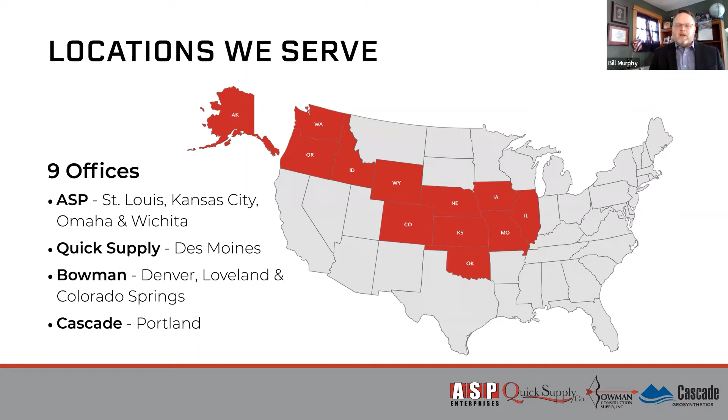You're familiar with our erosion control and sediment control solutions for sure. We do like to continue to educate folks on geosynthetics like we're going to do today. A lot of my time is spent on stormwater management with green infrastructure and low impact development. We're also experts in vegetative solutions, and some of our locations even have hardscapes available.

We are experts at logistics. One of the things we found as a challenge over the last couple of years, and we've been blessed to stay on top of it, is inventory management and receiving product in time to get it delivered to a job site. One of the things we're very good at, and I'll show it in the next slide, is receiving truckloads of product, breaking that down to exactly what you need on your job site and delivering it when you need it, where you need it.

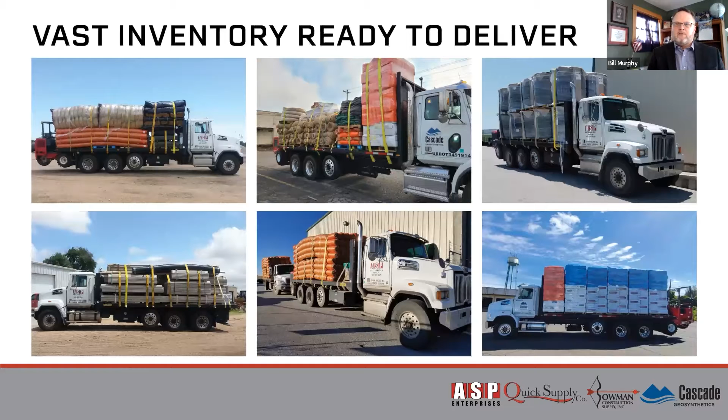We've been blessed to be essential over the last couple of years, so we've been very, very busy, and we plan to continue that trend. I was recently asked a question by a very good friend of mine at an engineering firm in Kansas City if we have any concerns about product availability with the Mirafi products, and I was very happy after I double checked with our managers to say, no, we have no problem at all.

We've been blessed, and those trucks are still rolling. So winter doesn't stop us. We've stayed busy. And as many locations as we're in, the pendulum swings sometimes from one market to the other. One thing stays constant: there's a lot of people trusting us with their site solutions, and there's a lot of people who have been with us for many, many years.

And speaking of many, many years, our next speaker here is in the room already, Jim Golomski. Jim is with Tencate Mirafi. I've known Jim for the 8 years I've been with this company and a little before that. Jim is one of the professionals that we lean on whenever you have questions for us, and he represents a number of our locations. I did not write down Jim's bio.

I have known him for a very long time. Jim, not to embarrass you or anything, you know that we have a good personal relationship and a good working relationship. I sometimes like to mention you're a guy with football experience and college experience, but mostly for me, it's that you're a family man with professional experience, and I get to see you again this week at Geo Omaha on Friday. Do you want to introduce yourself at all and add anything to that?

Yeah, that's perfect. That pretty much covers it. 1234. It's what? I hurried through. Yeah, right on time. No, perfect. Thanks, Bill, for the introduction.

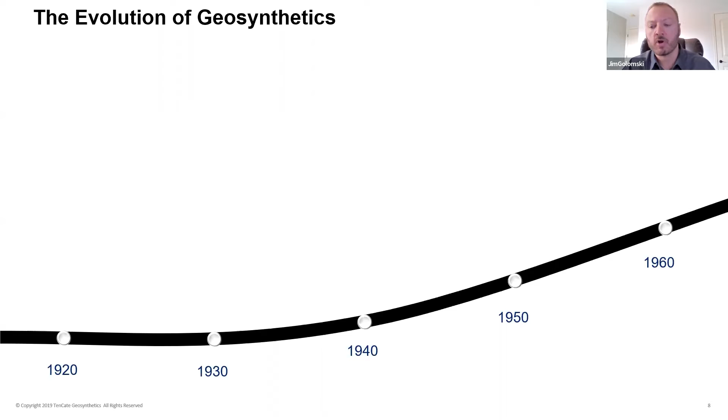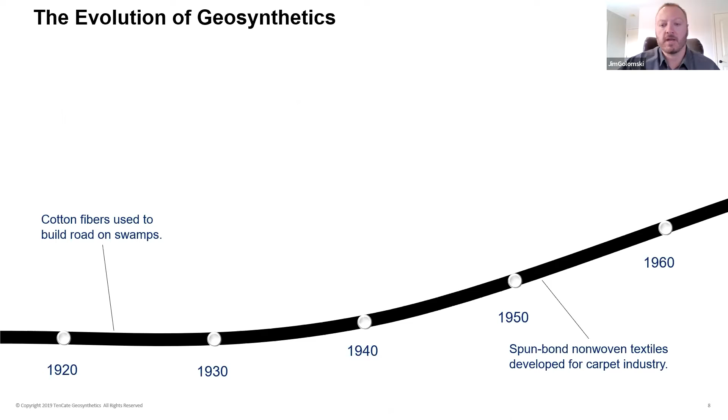Just real briefly, everything got started in the U.S. back in the late 1920s, with fibers used in swamps, but that's still not really our industry. The spunbond came about in the 50s, and our products are these needle punched nonwovens, which appeared in Europe - that's what the Mirafi products are. All of these came out of the carpet industry in the US, down in the Southeast, and that's basically where we were with nonwovens.

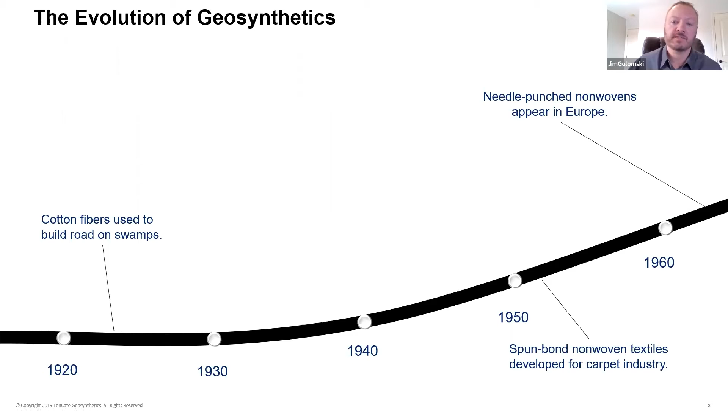Then Mirafi was named - if you didn't know the name, we get a lot of Mirafi. Mirafi comes from the names Miracle Fibers, coined a little bit in the late 60s, first used in a dam. Really, nonwovens, which we'll talk about, were the only product that existed until this time.

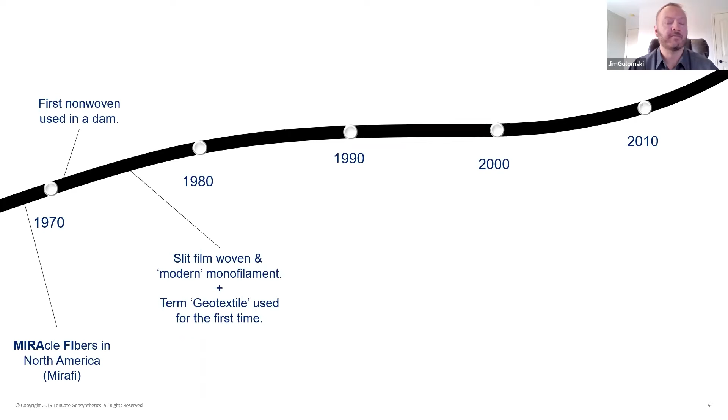And then we get slit films, wovens - ours are called the X series, but they're slit films - and then monofilaments, and this is where the term geotextile came from. The monofilaments are our product we'll show you that was really developed with and in conjunction with the United States Army Corps of Engineers for use for engineered erosion control, to be able to have high flow rates and high separation of products.

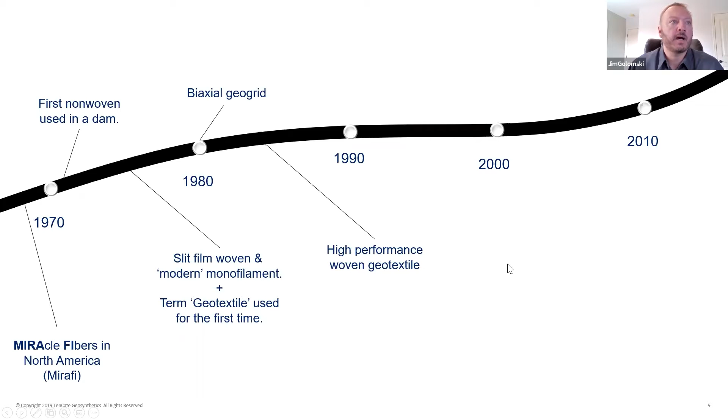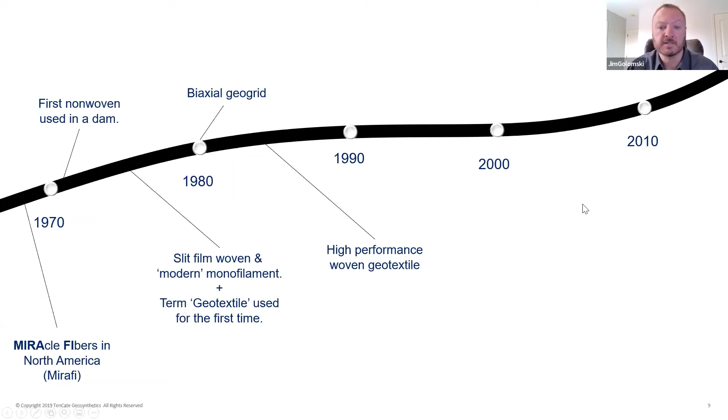Then in the early 80s, many of you might be familiar with biaxial geogrids, came over from Europe. Then Mirafi came out with high performance woven geotextiles - if you're familiar with that, it's our HP series, HP 570, very common. So we've gone from non-wovens to slit films, now we get biaxial HPs. And then the markets stayed a lot the same way until modern day.

In 2010, right when I joined this company, we came out with our RSI series, an integrated geosynthetic. Then a few years later, our Mirafi H2Ri. So that's pretty much our iPhone 13. Bill, correct me, is that where we're at in the iPhone world anyways? I don't know, I think that's right. I think we're somewhere close, but that is the most modern thing.

As we go, something eventually is going to become better. I don't know when, because we haven't had a lot of breakthroughs in these last 2 years, but I'm excited to tell you more about these products and show you some case histories and applications that we've used.

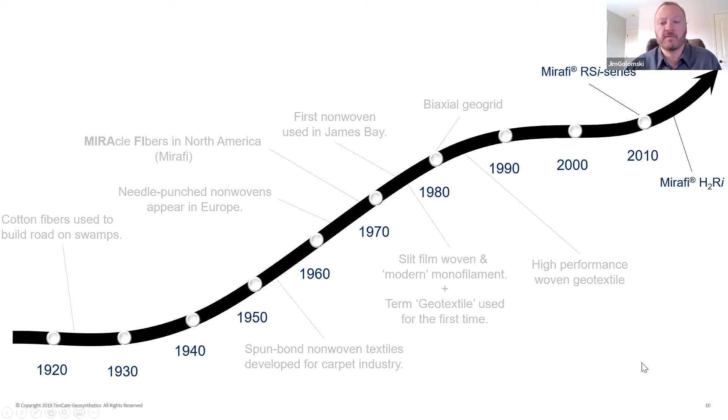Going back to the original product, the one we started showing, here's what ours looks like. Ours is called the N series, and these are non-woven needle punch fibers. All of these products are basically polypropylene that we make in our plants in Georgia, extrude the yarns, punch them, and create them.

Non-wovens are definitely the most common product out there in the market, and ours are basically described by weight. So a 4-ounce non-woven means 4 ounces per square yard, approximately, and we'd call that 140N. You have all the way from 140 to 32-ounce non-wovens, but common in the market you see 4, 6, and 8-ounce non-wovens used every day for French drains, wrap drains, erosion control, and cushioning layers.

In the environmental world and landfills, you start seeing the 16, 20 ounces much more common. That really just packs a whole lot more fibers into a square yard.

So as you want to make a geotextile stronger, you have to add more fibers to it, and the more fibers and strength you pack into each square yard, the lower your flow rates get. For example, a 4-ounce non-woven will not be nearly as strong as a 16-ounce non-woven, but it will have much greater drainage properties. The 16-ounce will have greater filtration properties because there's more fibers in there to separate materials. But they're very good products.

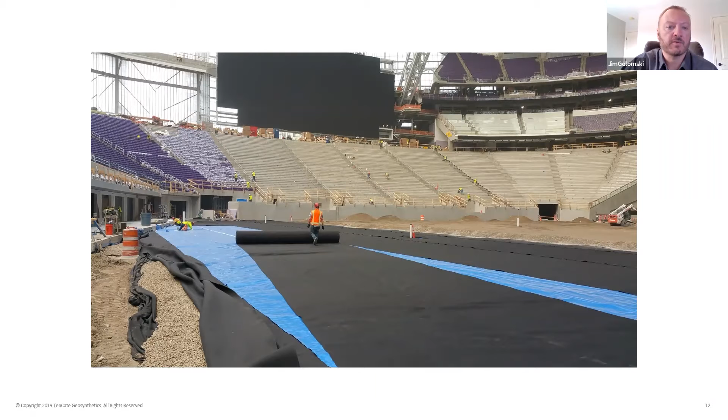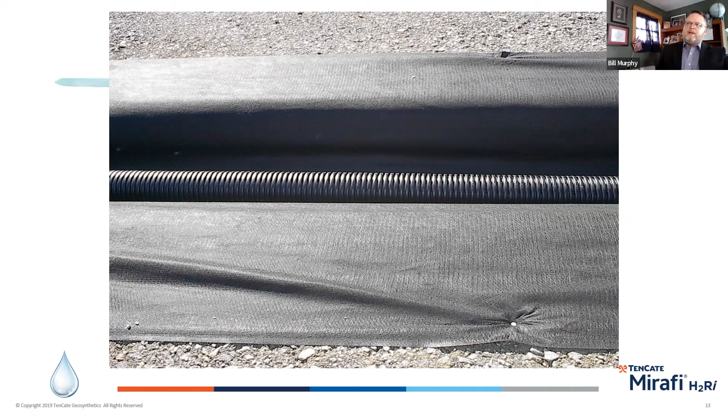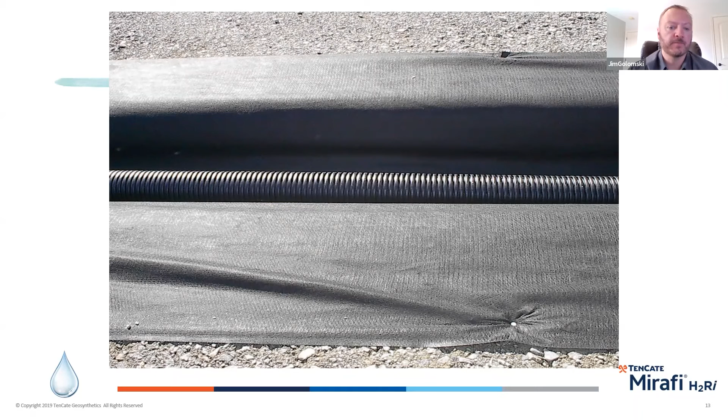Here's another very common one: pipe's going to be backfilled. So they cut a trench, laid the fabric, wrap it in rock, and then burrito wrap on top with the non-woven geotextile. I love that the burrito wrap is around the clean rock and not just around the pipe itself—that's a very good point. So yeah, the goal is, whatever soil gets put back on top, to keep that rock separated so that water can flow through that rock section and into the pipe.

After that, the next product, which I believe our slide said came around 1980, is a product we call X series. For us, 500X, 600X—other people call them STs, for slit tapes. Very, very common, one of the largest selling products of all time. And I'm also here to tell you it's our worst product. The industry has definitely evolved industry-wide away from these products. If you want to think about the manufacturing of this woven, it's much like a cassette tape yarn—very flat yarn woven very tightly together.

So what you get with this is separation—you can separate materials, but you get very, very poor water flow, which we'll talk about. And they're also very slick, and they're also weak as far as woven goes. Due to the manufacturing process, it's the best you can really get out of slit tape yarns. It was the best thing you could do from a woven 30, 40 years ago—I guess that would be 1980, 40 years ago.

That's why they were more commonly used. But definitely technology has affected the woven products much, much greater than the non-wovens.

So here's where you start seeing the evolution of geosynthetics within the wovens, because the properties that make them go—tensile strength, flow rates, frictional capabilities—if we're going back to an iPhone, this is like talking about camera increases in a phone: your ability to take pictures and video, storage, all these things where the phones can look alike, but the capabilities and performances are just dramatically different.

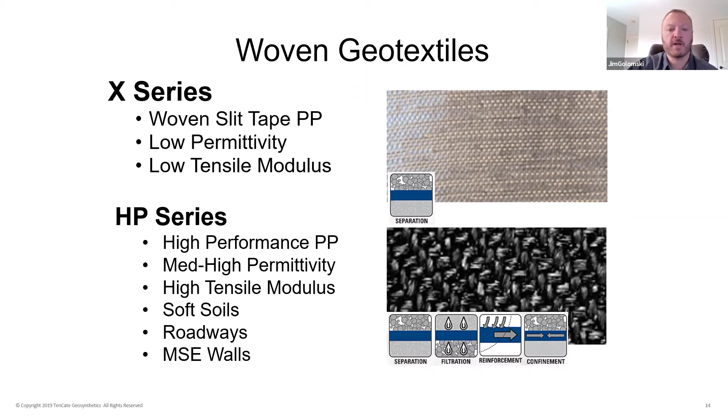The fabrics work by interlocking, confining, and tricking rock into thinking there's more rock than there actually is, by its ability to keep it in place. Confinement, reinforcement - making 8 inches feel like 16, or 12 like 25, is really the whole goal. So when using these for stabilization projects, there should be a huge cost savings versus putting natural rock in place to get equal performance.

And we have design software that I'm not going to touch on in Geo 101 today, but it is there for designing either paved or unpaved roads.

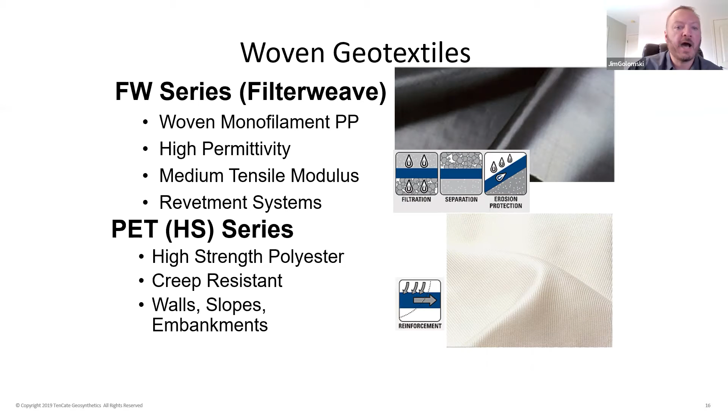It's an engineered product, very, very good because each hole is engineered and detailed to a specific size to keep soil and whatever's on the other side from intermixing. Here it's like a hard armor type system. But these holes also allow huge water flow, which is very important for any tidal or channel type application. Here's where you would look for a filter weave.

Versus a non-woven for erosion control type projects when it's tidal or water conditions, where clogging could be an issue long-term on a non-woven.

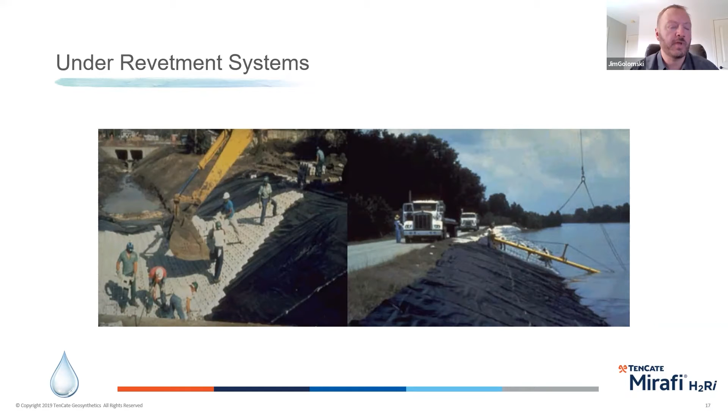So that's all of these products in the geosynthetics world - we're talking about Geo 101. That was geotextiles, wovens and non-wovens. And now the other half under geosynthetics comes geogrids. There are 2 types of grids: uniaxial or multi-axial.

Uniaxial is very common - these are for your walls and slopes. Geogrid has high strength in one direction. For us, and common in this industry, this is the one exception where it's not 100% polypropylene - these are polyester yarns coated in PVC. Polyester, from a purely tensile strength standpoint, has a much higher strength-to-weight ratio, and you're able to get a lot of strength out of the polyester grids.

So that's the product we sell - Miragrid XT is the product name, and I'm just going to touch on that. It has strength in one direction, so if the wall wants to fall this way, that force has to be directed back into the wall. Biaxial geogrids, on the other hand, can be laid any way.

Anything I'm showing you can be installed - it's pretty idiot proof. But with this stuff, if you took a layer of the grid and put it perpendicular to the wall strength-wise, your wall would fall down. So this is one where installation is very critical.

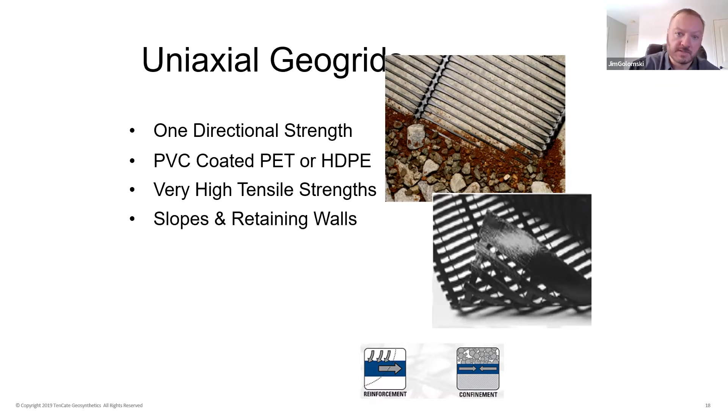And like I said, high strength to weight ratio, very good for walls and slopes. Staying in geogrids, biaxial geogrids have been around since the 80s, bidirectional and tridirectional.

These are typically polypropylene type products. I don't think there really are any more polyester biaxial geogrids on the market, I can't think of any. But these products are very good, very high strength at low strain.

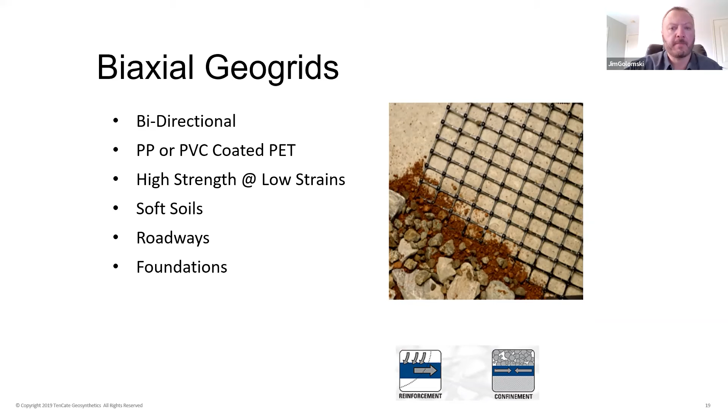So we kind of started with this basic overview of some of the products, but this is what we're looking for, the properties that define a geosynthetic.

And they can't all do everything. So separation is the ability to keep the soil and the rock from intermixing. Filtration is the ability to allow water to pass through, from that wet subgrade through the fabric into the rock section, without trapping itself underneath. Drainage is the in-plane ability to allow water to move itself out.

And then confinement, which is done in a lot of ways. On a fabric, it's done through friction, 100% friction and coverage. On geogrids, confinement is done through those apertures, where you get rock strike through, and that builds a matrix of rocks on top of the apertures, confining the rock so it can't laterally move. It's the same idea with a fabric used for reinforcement, putting an in-plane tensile element pulled tight so it reinforces that entire zone or road.

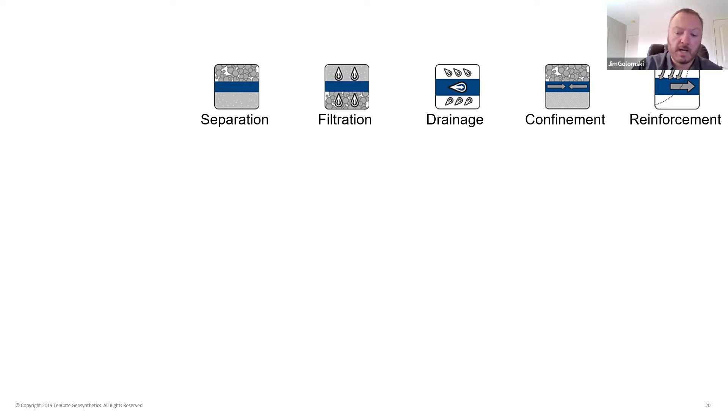As this industry has evolved, the question became, what can these products do? We just talked about non-wovens, filter weaves for erosion, slit films, geogrids, and high-performance wovens. And what are they doing, where do they excel? Non-wovens separate materials, filter water, drain water, but they're not great for building with.

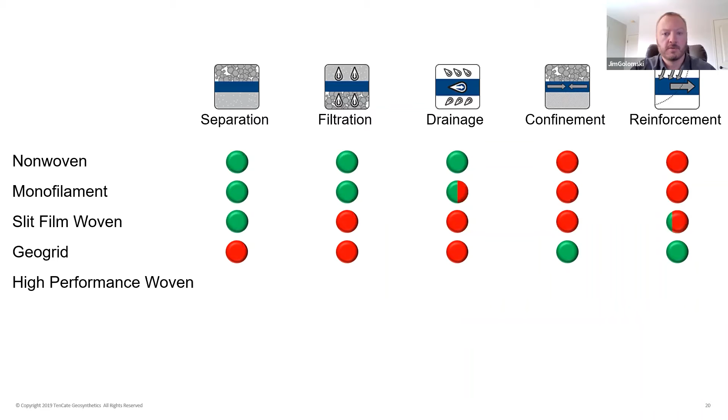Very similar to the monofilament, really the monofilament is the engineered version of a non-woven. Slit films handle separation, that's it, with maybe a little bit of reinforcement if it's a really high strength slit film. Geogrids capture the other side of this equation, confinement and reinforcement, but they don't do any filtration or separation of particles that can't be naturally filtered.

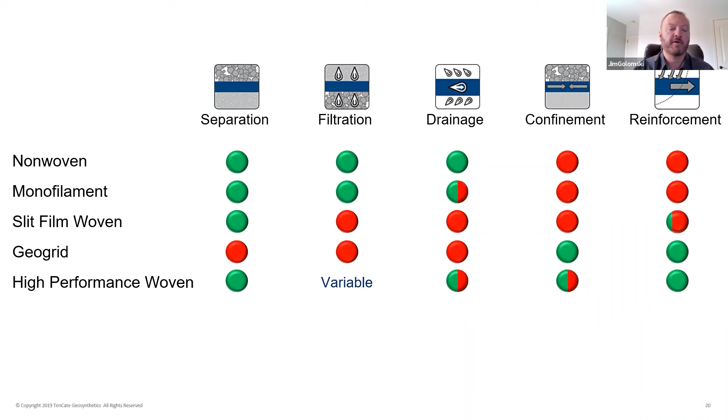And finally, the high performance wovens. All of these vary based on the flow rates of the product. This brings us to 2010 and the industry dilemma of, well, what fabric should I always use for what? One product cannot do it all.

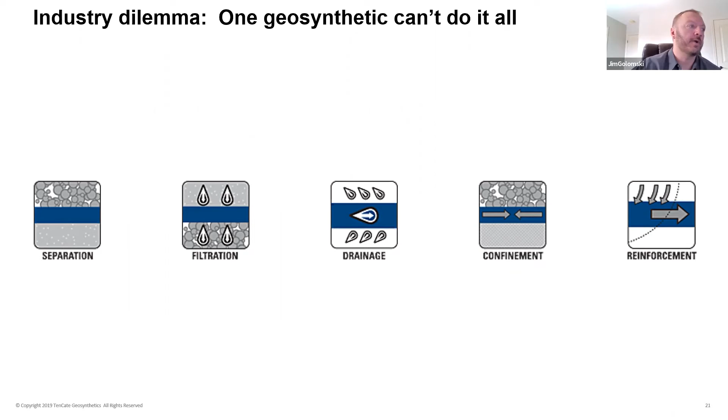Well, I don't know if we can give an award. This works better in person. But what decreases? Is there anyone in the Q&A? What's going to decrease as the strength of these products increases? I haven't seen any Q&A yet. Maybe you can give someone extra PDHs if they answer, I know it's super difficult to answer questions in this format. Unless we did a poll, maybe we'll evolve to having a poll where they click on something. That'd be nice, I'll make a note. Yeah, I was starting to think, did my Wi-Fi go out? Is anyone here? No, you're good. Is this thing on? Yeah. I'm going to hang up and listen.

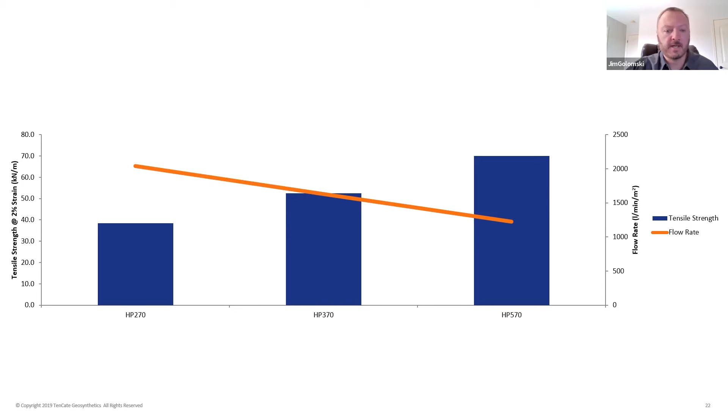So here's what happens to flow rates as tensile strengths go up. As we add material to the square yard, we add cost to the square yard, and we add strength, but we start losing flow rates. Some of you might say, who cares? Let's take a look at a study.

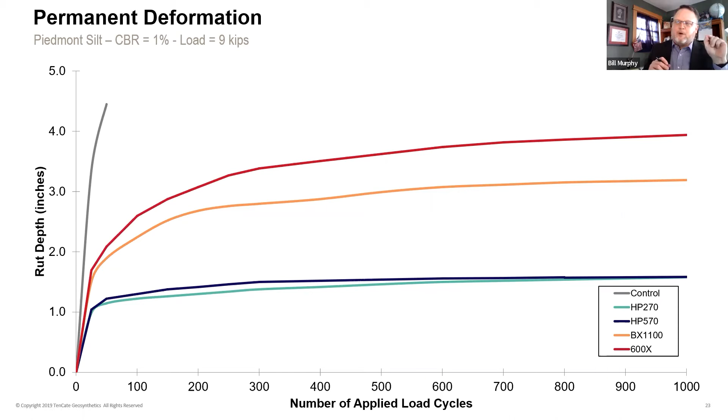Moving my picture again, you're sliding your display. Yeah, that only affects me, right? Yeah, it only affects you. And you're handling the lag like a pro—there's sometimes a 6 or 7 second lag from when you click it, but you're handling it very well. Sorry, my picture always ends up where I'm trying to look at something.

So this is a test they ran, and we have a CBR of 1. For those who don't know, a CBR of 1 is one of the lower strength soils we can be talking about. At a CBR of 1, you're probably out walking in this and sinking to your ankles—your shoes are definitely sinking into the ground. That's how poor of a material this is. When we test products, and quite often we're on sites like this, you want to test them in these conditions, not only because they shine, but because they're absolutely needed.

The BX 1100—the gray is the control section on the far left. You can see, and this also speaks to any geosynthetic in a soft soil, it's going to benefit you; it's just a matter of which one you should use. Next after the 600X was the Geogrid, the BX 1100, which is a very good product with very good confinement. But what's clear is happening here is at a CBR of 1 you're going to get that mush underneath coming up through and interacting with the rock section. The more interaction of soil coming through and interacting with the rock, the more the rock acts like the soil.

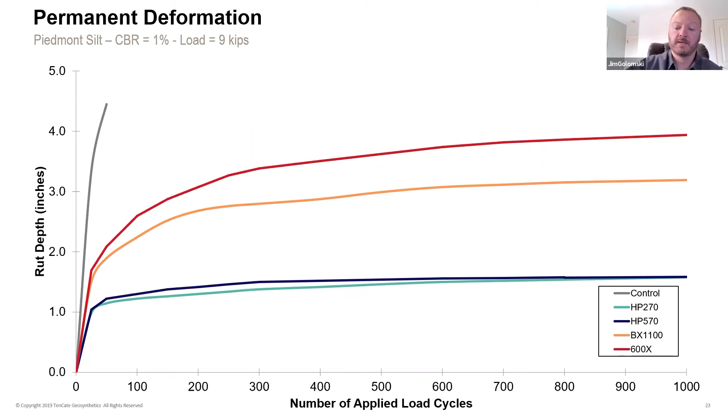Then we have HP 270 and 570, and this really confused our people, because prior to this everybody always assumed more strength, more tensile strength, greater performance. But these two products came in neck and neck. This led to the next question asked, which is about flow rates, getting back to it—so why does it matter that a product can be stronger but perform weaker?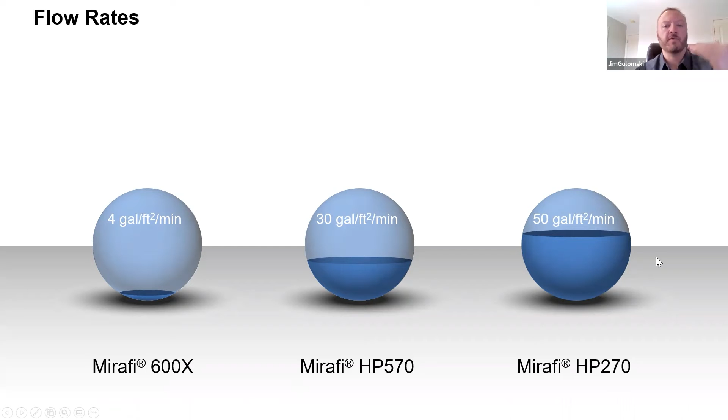Excuse me, going back one—so our X series products only allow 4 gallons of water per square foot per minute. Our HP 570 is 30, and our HP 270 is 50 gallons. So it's that free flow, that ability of water to move within it and not get trapped underneath it, which is helping with these deformations.

So here's the pore pressure development when they tested 600X versus a very light HP 270. You see a dramatically less pore pressure developed underneath the fabric and within the subgrade, leading to rutting and deformation.

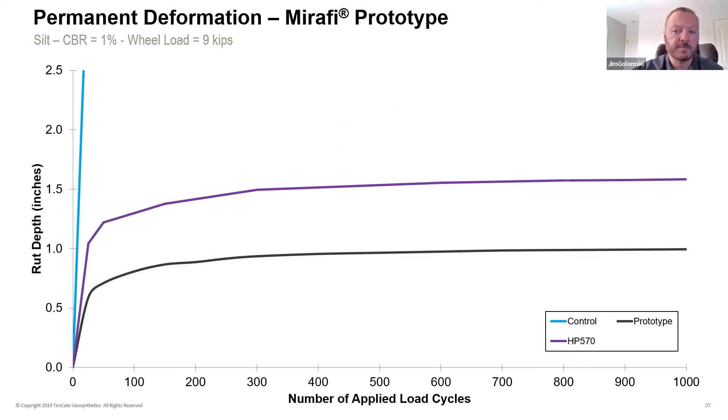And so then they developed this prototype product, which we'll now get into, to capitalize on the strength benefits of the HP and the flow rate benefits of a lighter HP. So you put those same terrible CBRs down, and you can see how much better—more than double the performance—this HP 570 hybrid prototype is. And then we brought that to market.

Then we're going to get into next—it's called the RSI series. There are two true real problems now as we start talking about utilization of these products within roadways, or structures: there's separation of materials and there's moisture issues. First we're going to really concentrate on separation and strength.

If you don't have separation between your soils and aggregate layers, you're going to lose aggregate into your subgrade just during construction—it just happens initially. You'll have infiltration of your subgrade fines into your aggregate base, and then you're going to have a dramatically reduced structural capacity of that road. I've seen so many things depending on your CBR—you can lose up to 20% of your aggregate during initial construction at a CBR of 2, and a 20% reduction of your rock leads to close to 40 to 50% reduction of your carrying capacity if we're looking at ESALs.

And then moisture, on the other hand—the problem with moisture within your rock section or your structure is it reduces the shear strength of your soil, reduces the resilient modulus of your base rock, and increases damage from freeze-thaw cycles.

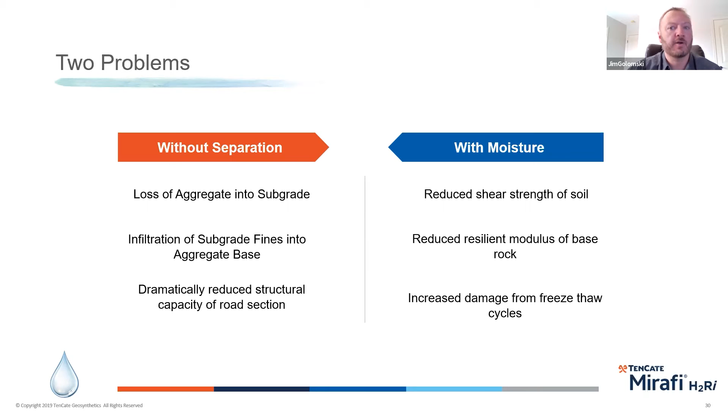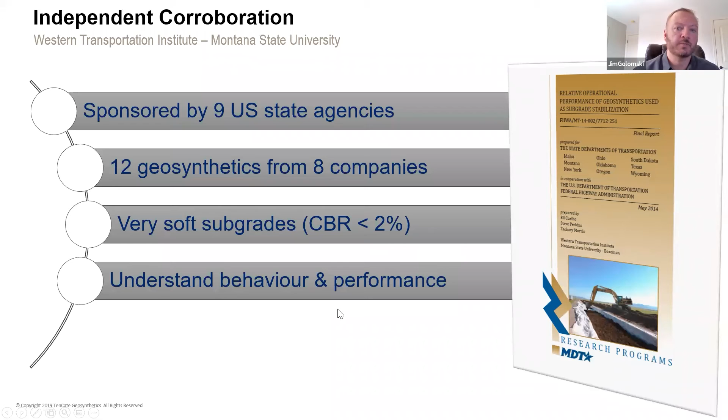So here's the newest generation of our fabrics that incorporate everything: the Tencate Mirafi RS series. Ten years ago this came out, and one of the first big studies done—we'll touch on it—was sponsored by 9 state DOT agencies. It was the Montana State study under very soft soils, with no input from manufacturers.

And sponsored—so I don't know, do we have anybody from this territory in it? Nebraska, Missouri, South Dakota, maybe? Maybe, yep. Maybe Wyoming? Maybe. You guys cover that footprint now, so you guys go out there. Yep, we go all the way from the Rockies out to the Pacific Northwest.

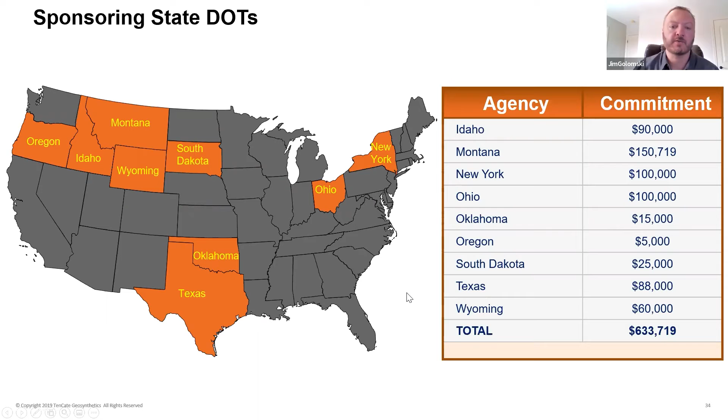So I go all the way down in Oklahoma, and based on this study, they started using this product quite a bit. It was nice to see them take the research and say, okay, I like the way that looks, and they trafficked it until it came out. The RS580i at the end came out as the highest achieving product: the greatest number of passes, the lowest amount of deformation, and the lowest deformation at any point throughout. This was one of the things that came out of the study, because a non-woven was on this and fared okay.

Why is separation so important? I'll have to speak for everybody unless Bill wants to interject. What are we looking at here in this picture?

That next slide will tell the story that I tell, because I live on a gravel road and I have to keep adding gravel to my driveway. I have no separation in my driveway.

So after this test was done, they went and exhumed sections. These lines here—the pink-red line going through the section—that's the area where the fines, or the soil from underneath the fabric or geogrid, migrated all the way up into the base rock section. An 8-ounce non-woven performed okay on this test because it was able to keep rock above it and soil below it for the time being of the test. Eventually this would have been too much pressure and it would have ruptured, but it was able to separate it.

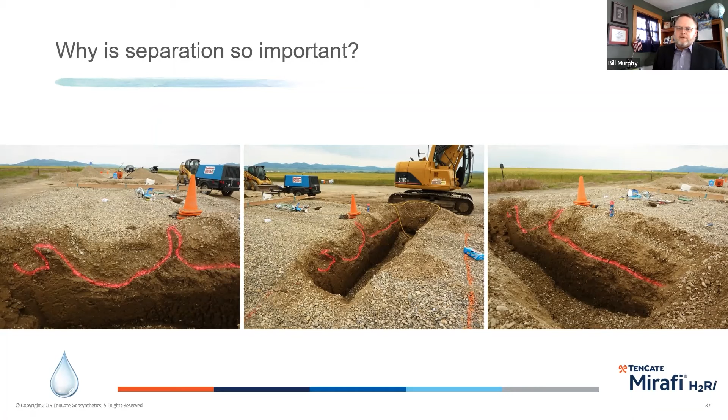And your next slide is the one that really tells the story for me, that old adage—pretty obvious, right? 10 pounds of stone placed on 10 pounds of mud is 20 pounds of mud. Yep, that's true. That is true.

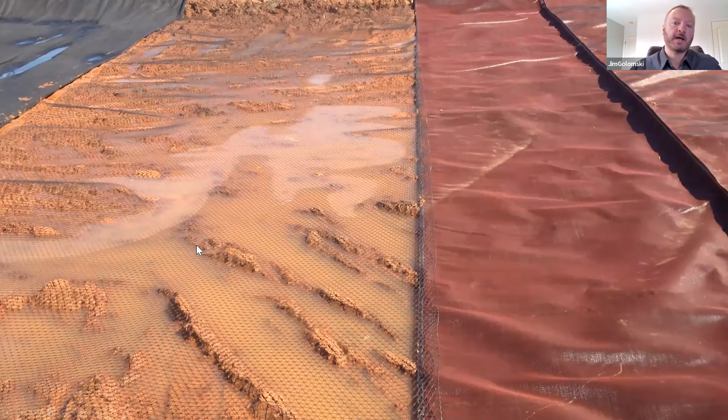Thank you, Bill. Here's kind of a test pit we've looked at. This is when you get on real poor soils, probably a CBR of about 1, that we do some tests when we train people and bring them out to see our products. This is our pit, and you can see RS, geogrid, and then a non-woven on the far side. We go out and walk on them just to see how they interact with these conditions.

I love that. You had me down there in Georgia, and I did that at Mirafi U. We had that CBR of 1 when we first stepped in, but then it just got better as we made our way across.

Yeah, and it really is something walking on the different products and seeing what happens. Some push all the way in, and then others you step on and the water just dissipates through the top of it.

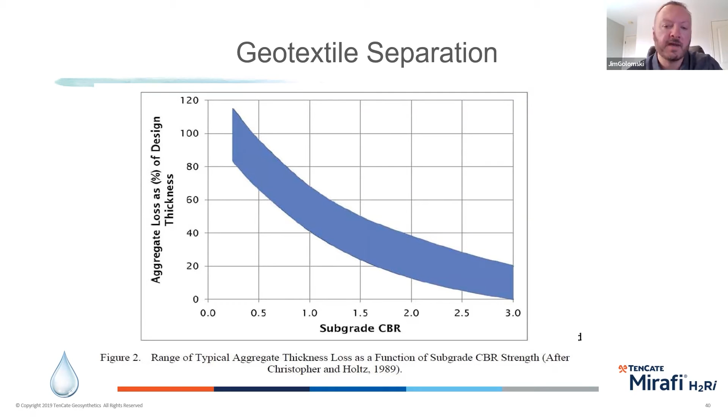Well, what does that matter? Yeah, I put 10 inches, so great, I only have 8 inches. Well, looking at this, if you lose that 20% of your structural carrying capacity, and you start looking at what a 6-inch asphalt looks like over 8 inches of rock versus 10 inches, we've now lost up to 50% of our road capability. So when roads are supposed to last 20, 30 years and they're lasting 10 or 15, this could be a huge culprit to what is causing those conditions.

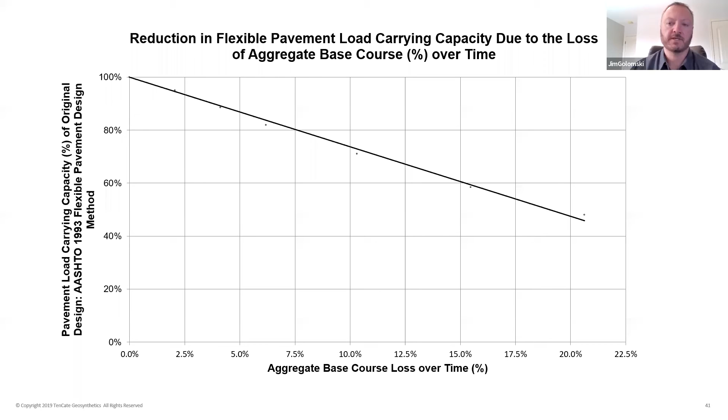So this is a term that was coined a couple years ago, and I absolutely loved it. If we're talking about building roads, this is a perpetual aggregate base. It's the combination of a common unbound aggregate base and an effective separator to establish a permanent foundation, permanently keeping everything you bought and put on top of the fabric above it, not losing it through the fabric or through intermixing. This dramatically lowers the life cycle cost of the road.

But here's some of the good stuff. It separates dissimilar materials, so your road never requires full depth reconstruction again. Mill and overlay programs can truly work because we haven't destroyed the subgrade. Keep the rock you buy above the fabric and keep the subgrade below the fabric. Separation allows the use of freer draining base aggregates.

Stabilization, confinement, restraint - confinement stabilizes and strengthens the subgrade's role. The subgrade's bearing capacity can typically be increased by up to 80% just by incorporating some sort of high-strength geosynthetic or fabric and keeping dissimilar materials from intermixing.

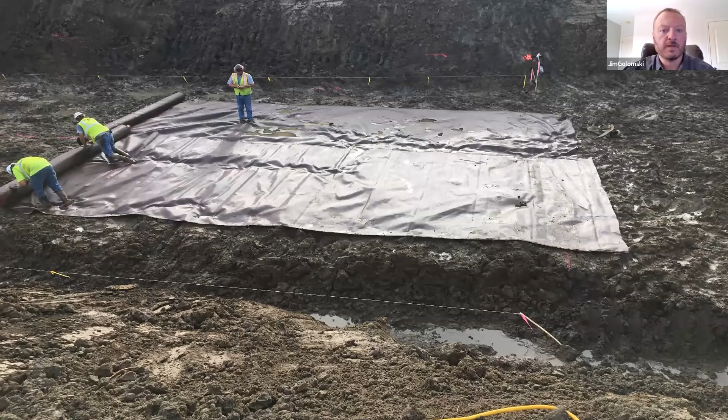This is a project we did with ASP over in Missouri.

Wow, Bill, I think we got a little issue. Yeah, I'm not touching anything. What is it, is it supposed to be a video? No, it just got a mind of its own for a minute. It kind of froze up, so we're good now.

I was called out the day before, and a guy had sunk to his hips trying to stake some of this area. They pulled him out with a rope and a track hoe. We talked about numerous things and finally found blow counts of 0 past 30 feet, so there was no bottom to this.

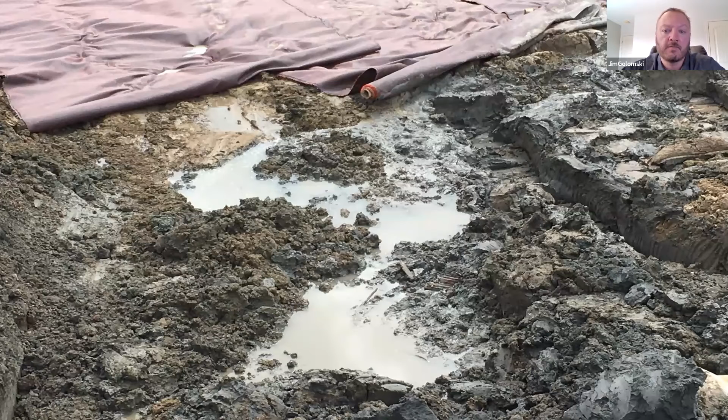So we had to put this fabric in, and the contractor was convinced it was not going to work. As soon as we got it down and started kicking and rolling it, it was a good situation - it was very hard to walk on. This is how you had to do it. Very soft, very poor ground, like I said, CBR of 0.

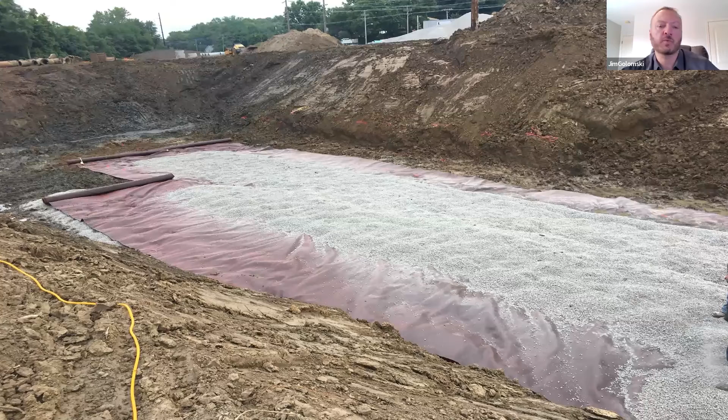We were able to shoot rock onto this site and just get building immediately. There you see some overlaps - we went with a 3-foot overlap here, though we didn't really need to because of the belt shooter. Typically, like I said, you just spread that rock.

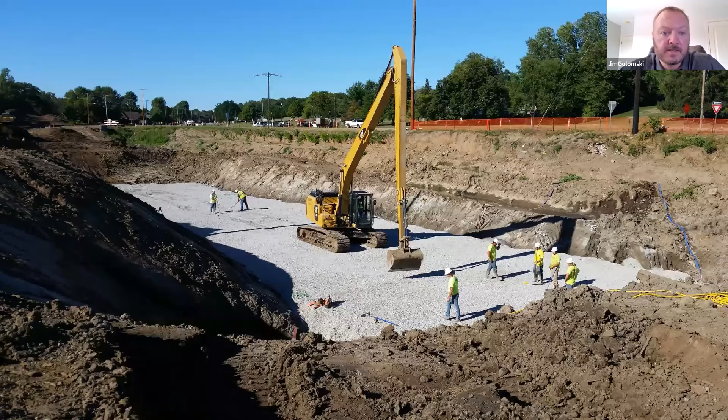This project has actually led to a relationship with this contractor. We're now traveling with him around the country, working on some huge plants for big steel companies who are using us exclusively to build all their plants because they had so much stabilization success with us.

So now that we've talked about RS, the next evolution from that is a product that can help with moisture. I just want to be able to show a few things on this and some local project installations.

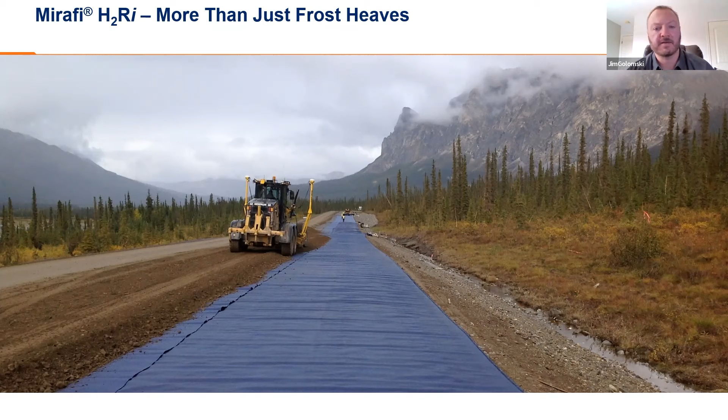So now we take a product that's very similar constructability-wise to the Mirafi RS, that super strong fabric that does everything, and we've added the ability to move water. The biggest problem with most structures is drainage - how do you move water through it? Understanding with any structure, the threat is water within it. It accelerates the deterioration of the asset, loss, risk, and takes away time and resources.

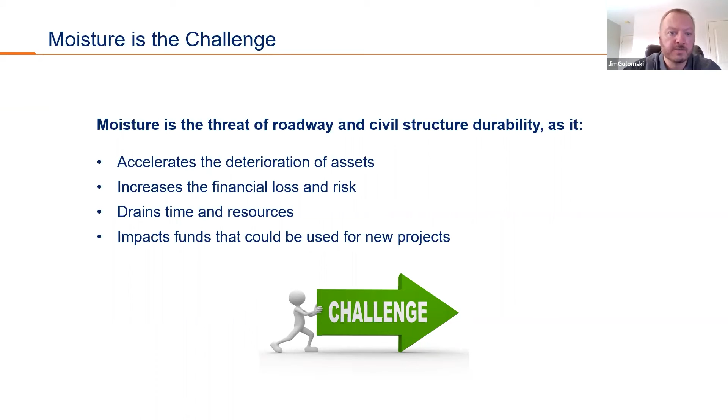I'm going to move a little quicker through these so we make sure we get to some things - well, we don't have a Q&A going, so that'll just be for me. So you're doing great, okay.

And moisture costs money - what does it really do? I'm sure Kansas City, this whole Midwest, has terrible pothole problems. $4 billion annually, which translates to $600 a driver. I remember a couple years ago giving this similar presentation, and as we were going I literally got hit by a rock coming through a pothole that put a crack in my windshield on the way to give it. So I'm very familiar with what rocks on the road and potholes can do.

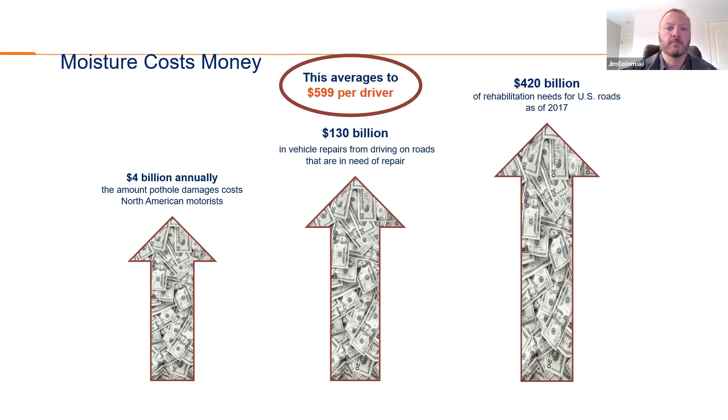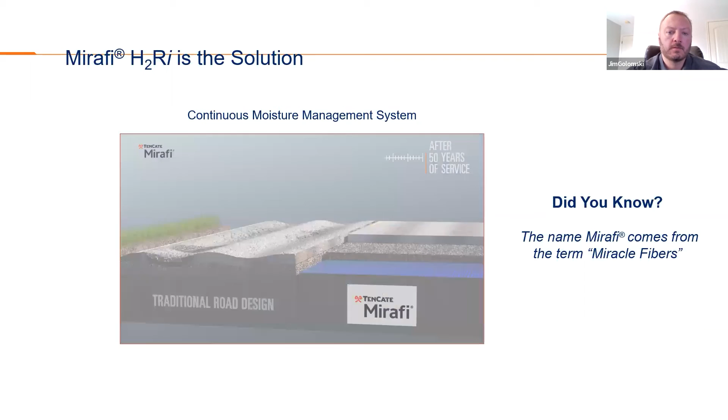So, and then this one, in my opinion, is even a little bit better. Come on.

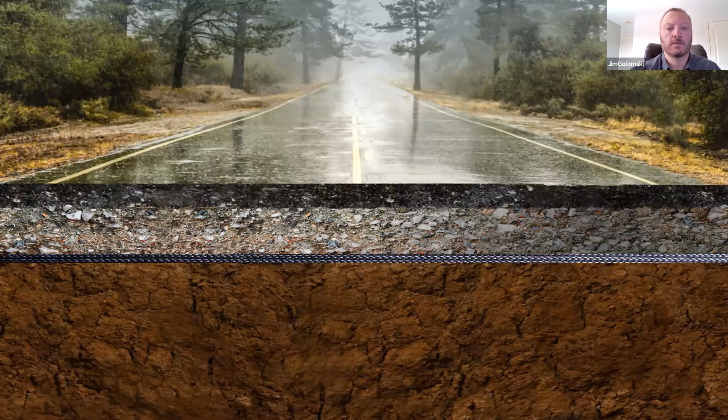Shows the water making its way down, hitting the fabric, or water from the top down or below, hitting the water, hitting the fabric, and then removing itself.

So the big key to this, guys, now we're looking at a product that separates materials. It provides filtration and separation. It provides reinforcement and confinement. It is a very, very strong frictional product like the RS, but there's nylon wicking yarns woven into this pattern that pulls water from unsaturated conditions before the soil can fully break down, or before your base rock gets real wet and breaks down in strength, and pulls it out.

The one caveat for installation here: water has to have somewhere to go. So if you would just bury this in a curb and gutter, it would effectively be like RS580i. But if you give it a chance for evaporation to work, then it can continue to pull.

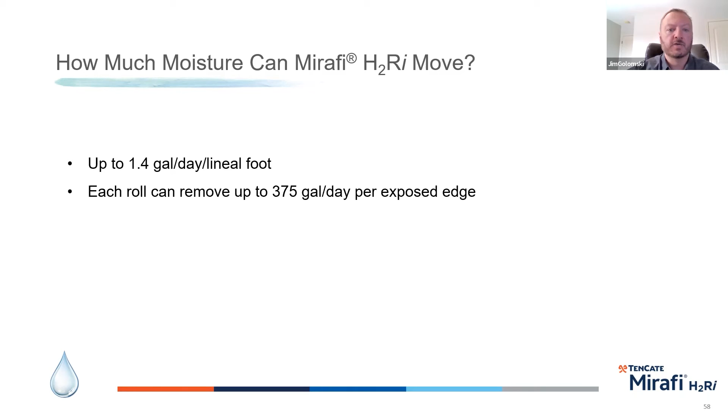How much can it continue to pull, you ask, Bill? Well, up to 1.4 gallons per day per linear foot. So every foot of exposed edge is 1.4 gallons. That means a roll is 375 gallons, and 1 mile is 15,000 gallons a day.

Pulling from not only the subgrade, but the sub-base material. What's critical here is it does not work like a drain that gets full saturation and then the water bursts through. This continually moves moisture, so as anything draws near, it moves out. Why is that important? Because at full saturation, the soil breaks down. You get full saturation, you get a weaker soil, loss of shear strength, and that CBR that's a 3 becomes a 2 and worse. So this keeps it at more optimal levels.

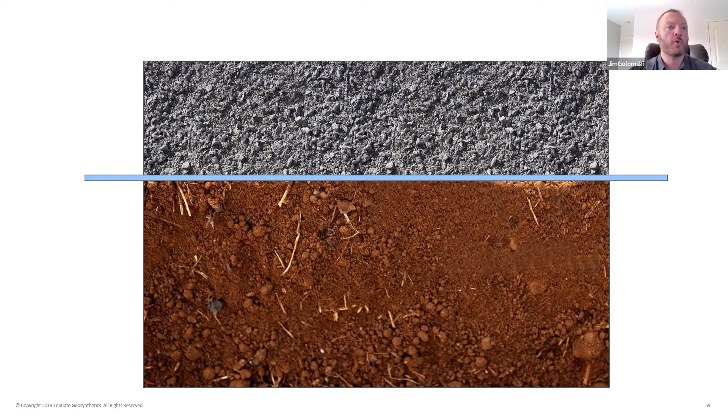So how was this developed? This was the initial road, ice road truckers, if you've ever seen this before, and you'd come over this hill and the truckers would hit the brakes and they'd rut and get this every single year.

I don't know what's going on, Bill, but I have dates that should be showing up on this stuff. It's working, everybody else sees it. We all see it, your toolbar's just covering it up. Gotcha. The viewers, the attendees are seeing it. So am I. Perfect, okay.

And they came back next year. So every year they had to rebuild this, and they put this in, monitored it, and every year they've come back, and it's not. So you see there's a rut that is developing immediately before the staking of where the H2Ri was. So the DOT was so happy with it, they started doing numerous other projects with it.

And you can see here's a real prettier one in Alaska. Here's post. We get asked about that edge treatment right there, because that was one of the first ones. You didn't really do anything specific with the edge, you just daylighted it. Correct, you see the amount of the daylight and the moisture.

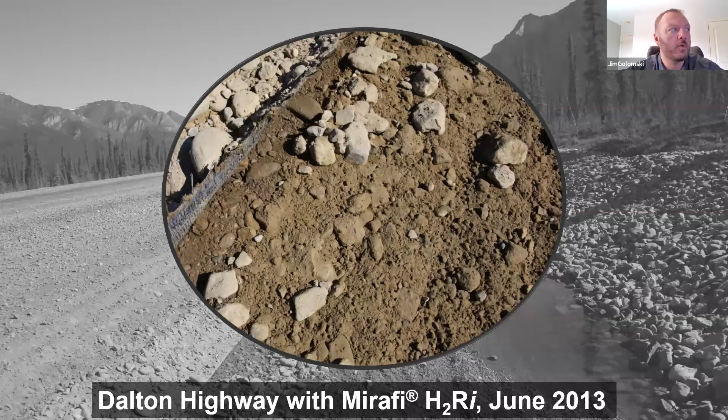And then here's even a little more, this was years ago over on the St. Louis side, but here's Boone Bridge. Put this in, very hot day, probably August-ish. Well, I know it was August, September, something like that. And we got a big rain event that night after we installed this for the approach. We came back out that next day, and you could see it was still moving and sucking water out from underneath either the rock section or the subgrade and bringing it out to the sideline.

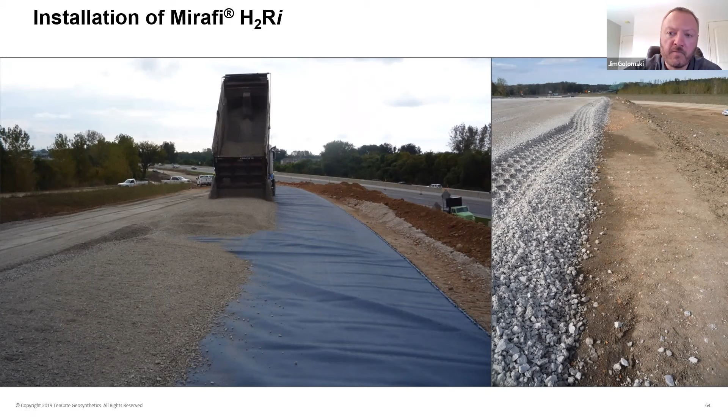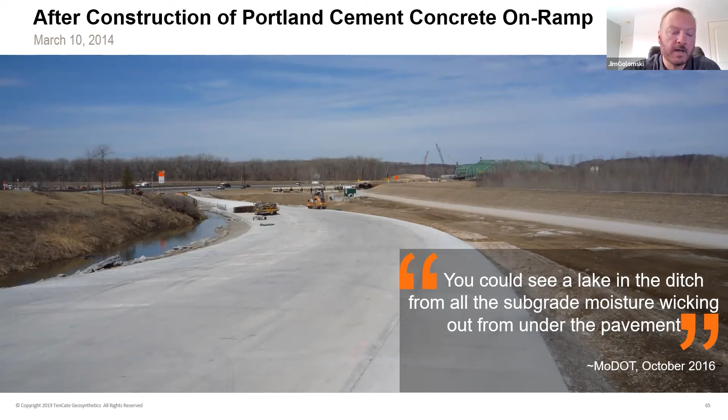Everything else was bone dry because it was so hot that next day, but from where it had rained, you could still see the movement of water. Now, one of their engineers said this was the project when it got paved, that you could see a lake in the ditch for MoDOT. I don't know if all of that water can be attributed, because it's not going to look like a fire hose, guys. It's a constant drip of it hitting the soil, but it's nonstop movement that continually gets it from out underneath the structure. So like I said, a 2% reduction.

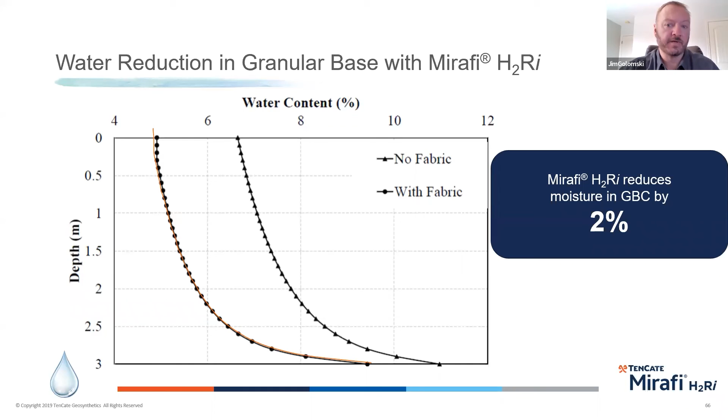This was through Kansas, did the testing on what does it do to your rock section. It's a good 2% reduction in the amount of water that's in your base rock. What does that mean? That means an increase in your resilient modulus by up to 150%. So 150% stronger your rock becomes, which then correlates to a greater than 50% reduction in permanent deformation of the stone. So just with that 2% reduction alone, it's a huge increase in the reduction of deformation.

This is not even taking into account moisture alone—this is only pulling water out of the rock. It's not talking about draining the subgrade, pulling water out of a subgrade, or the separation, reinforcement, and confinement this fabric provides. The amount of things it's doing within a section, it's almost a living component by its ability to permanently move moisture out while separating and reinforcing those common and discommon materials.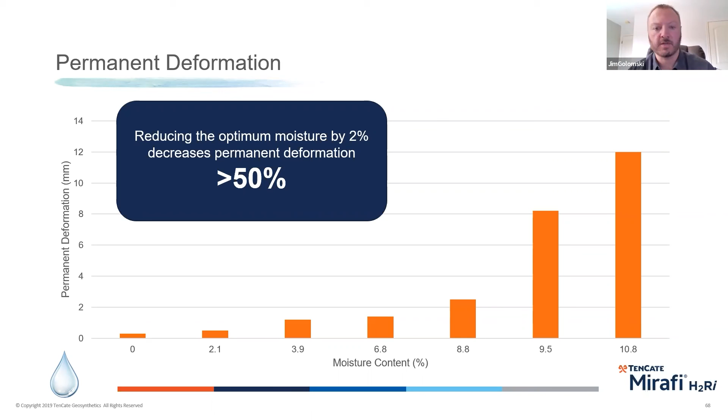So what's it look like? Underneath the light, there's some testing we did with a black light, and you'll see the fabric glow yellow—that's just the water as it pulls it out.

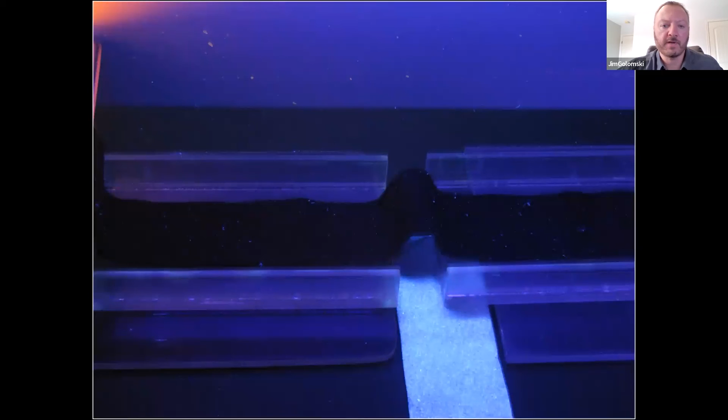And then what if there's a hump or undulations in the subgrade? It takes it right up and over, continuing to move it. If we do the same thing with a non-woven, it can definitely saturate instead.

You can see this happening during installation where a contractor might get a wrinkle in the fabric—they don't pull it tight, and there's a little bit of a fold. With this material, the difference is it can get wet and move the water. It's not really moving it actively; the water moves as the fabric saturates. But if it reaches a certain point, with a non-woven you'd just get an undulation where it stops and starts pooling. This shows its ability to actually move water up a vertical grade.

So I'll wrap it up with a couple of points. This shows the difference that wicking can make—that wicking ability is huge. The clothing industry has invested billions of dollars in the wicking idea. And just think what it could do under a road for 20 years, constantly wicking.

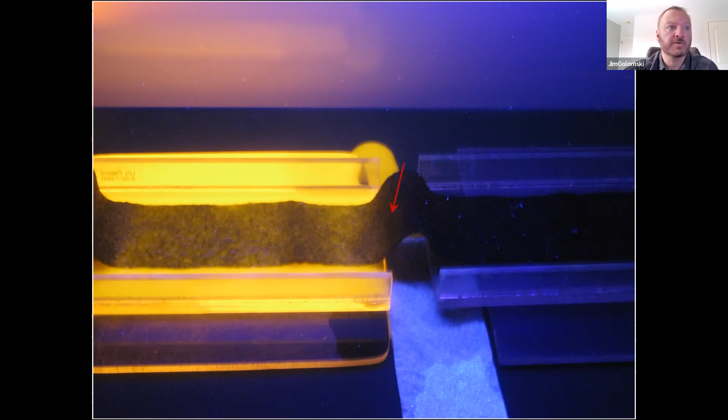Yeah. And actually 50, 70 years, whatever. So the Kansas DOT actually did some testing and became big proponents of this, and we've started using it on some projects there.

What they were finding is they'd like to use a cement treated base for stabilization, non-wovens for separation, and under-drains, which they found always clogged—plus a more expensive rock that doesn't drain as well. So they thought, could we use an H2Ri? It hasn't eliminated everything yet like we think it could, but they wanted to start testing it. Can we use it instead of under-drains? Can we now use a less expensive rock that doesn't have to drain as well, like a 1.5 inch or 3/4 inch minus—I forget what Nebraska calls it, it's AB3 in Kansas or Type 5 in Missouri. Can we use a less expensive rock that doesn't have to be as open graded so it can drain? They did some testing and found yes.

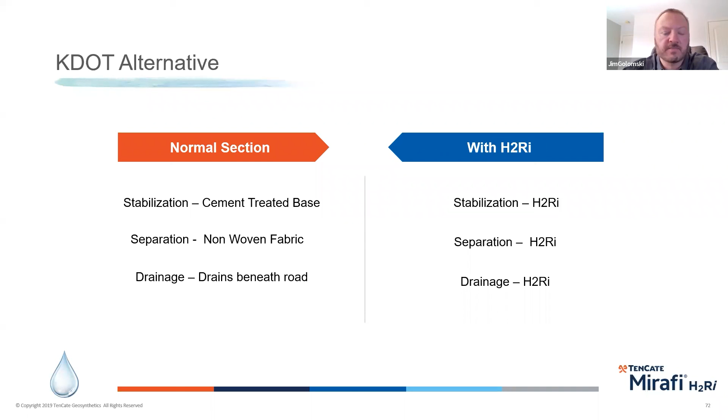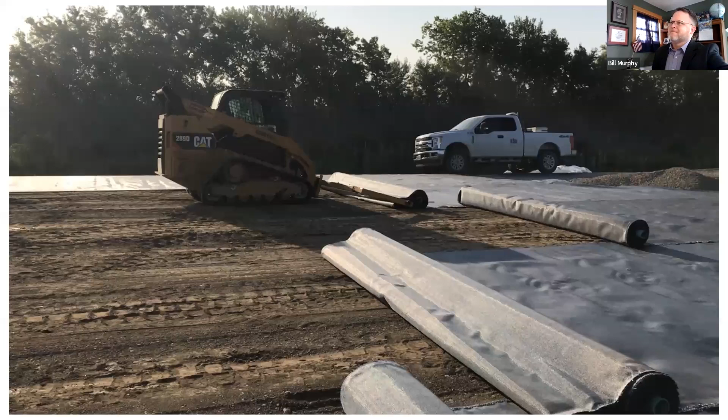I really hope yours is playing better than mine. The audio's working, yeah. Talk over it if you want—take pictures for the thousand words here, Bill.

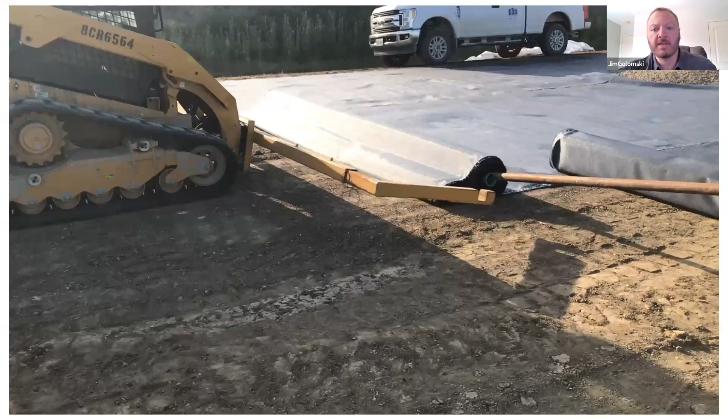But this is pretty nice operation they've got—one of these spreader bars. The fabric comes on a core, so here they can run this, pour it through, load it up, and reel it back. Like I said, most operations are not this sophisticated and this smooth. These guys are really good, a big contractor in Kansas, and they can install a whole lot of it in a short time.

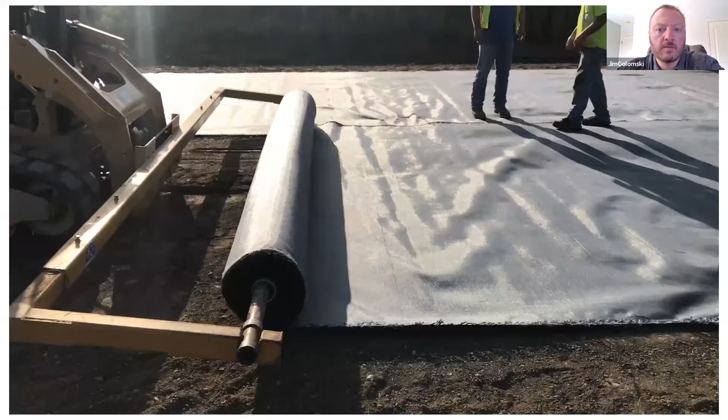But yeah, this is highway building. First you saw the two guys kneeling, trying to kick and roll it out—four rolls in a matter of a day and a half or two days. This shows how much simpler it can be in the right application.

So yeah, we've done multiple jobs there. Another ASP webinar we did covered the track at K-State University, which was delaminating and had huge issues—he was worried about water moving up within the track section.

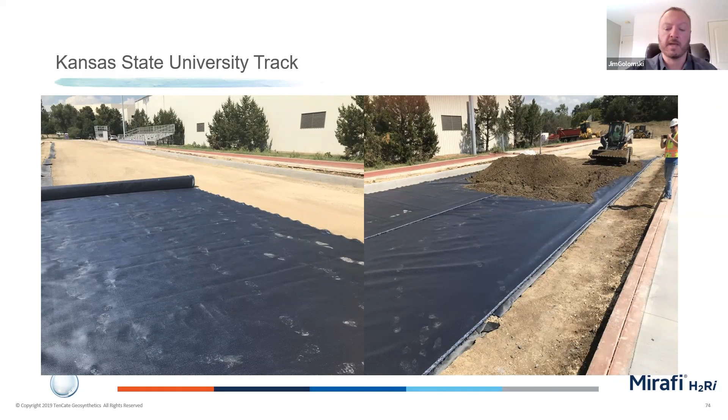He wanted to use the H2Ri not for any other property, but besides its wicking. So we did that a couple years ago where we tied it into a collection system at the bottom, inside, all the way around the track. It's been a number of years and it's still going great. That's beautiful, went really well at the time.

So we need to take Todd Noble out there and see if he can set a new personal best on track speed. I know we've done numerous tracks, more out west, where people have used it for very similar purposes.

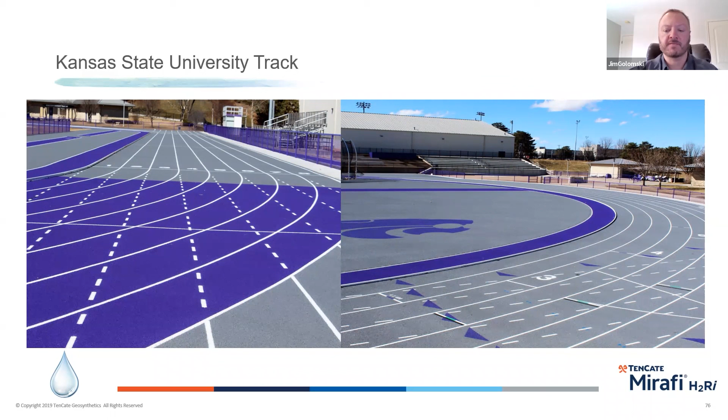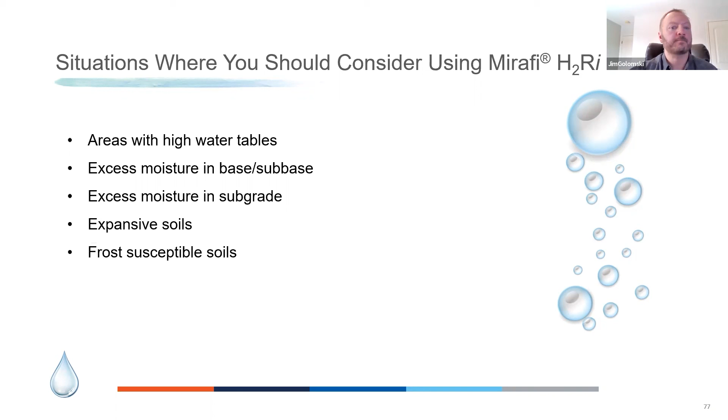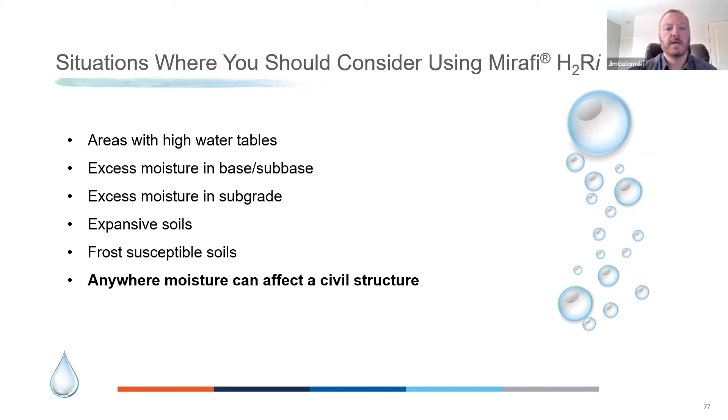So just wrapping up, where should you think about using an H2Ri? High water table is number one - anytime the water table is rising and you could get rid of it, do it. Excess moisture in your base and sub-base, moisture in your subgrade, expansive soils - this fabric has the ability to mitigate moisture differential and swell by spreading the water. It really wants to take things from where they're wet to where they're dry, so there's a continuous moisture management system going on under that soil. Frost susceptibles too - being able to move water before it can turn into ice lenses, things that melt and leave giant potholes in your roads, and anywhere moisture can affect a civil structure.